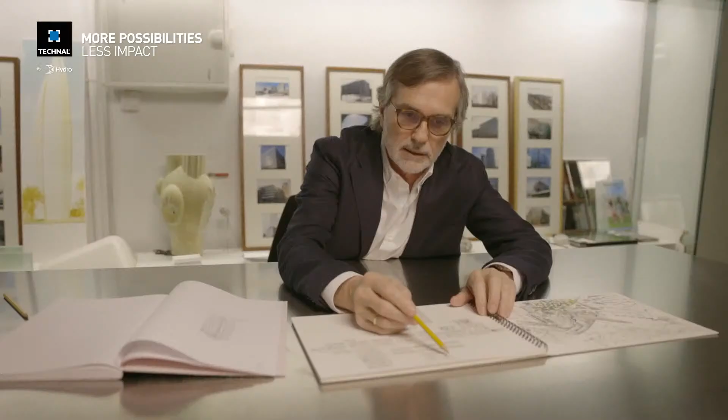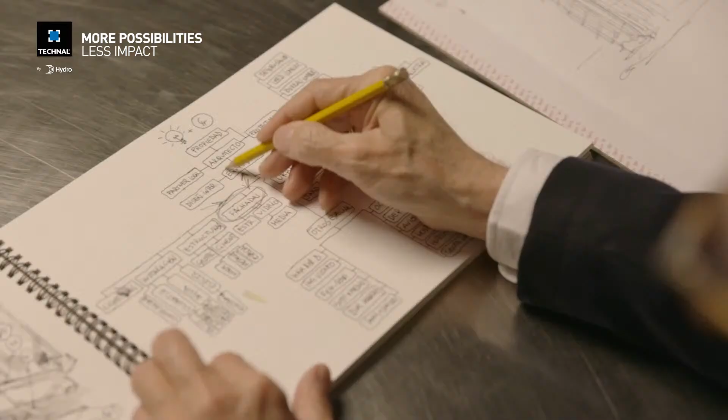First of all, I would like to introduce myself with a simple sentence. Yes, I'm an architect, but an architect with a special profile, because my team and I have developed more than 180 buildings in the last 30 years, making credible the ideas of others, sharing them by teaching in different universities, and especially drawing. We have a small and very dynamic office based in Barcelona, from where we offer facade consultancy for the best architects around the world, including Pritzker Prize winners.

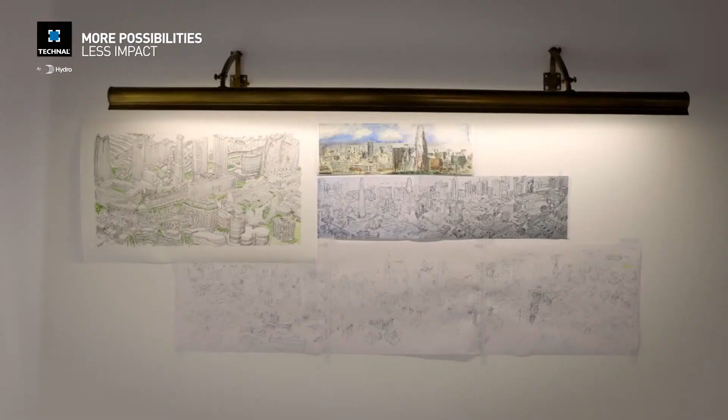Usually, architects imagine the result and the engineers create the process, or explaining it another way, architects think what, and engineers know how. So we, as facade consultants, move in an equidistant position between both, and our projects are developed with a simple philosophy: technique and form are the same.

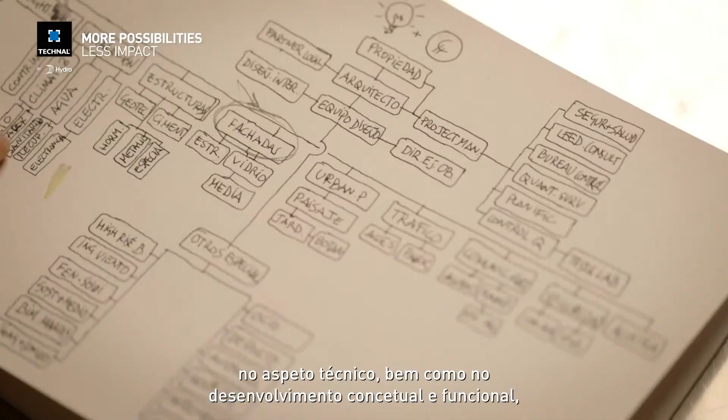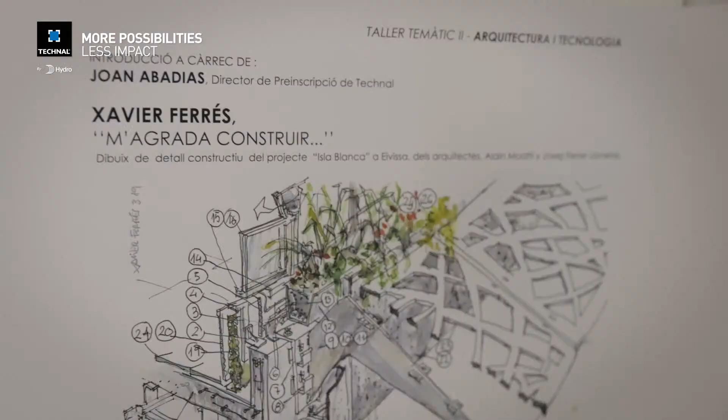Every day, more and more architecture studios focus their work on the level of definition of the facade, the technical aspect, and the conceptual and functional development, leaving the detailing and the specific topics and elements of the facade to be delegated to technical specialists from the industry. So the most common way to face the problem of technology is to claim the support of brands that help us develop the most ambitious projects. Our role as consultant, in addition to the above, is to think and advise from the strategic development.

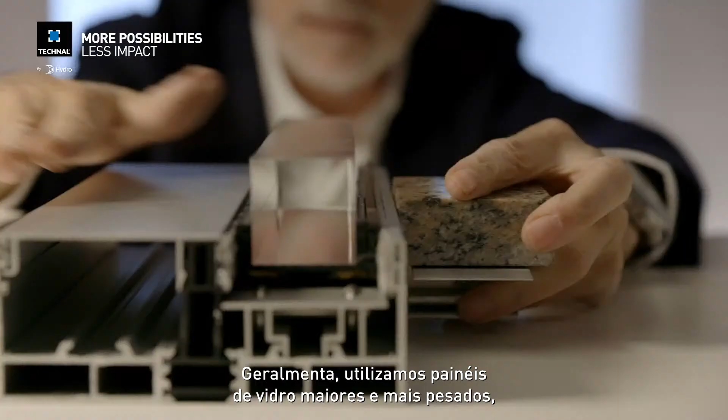The present leads us to consider energy as one of the engines of evolution, and this has been the case for decades. However, this contrasts with the need to work with large formats and glazed surfaces that increase the so-called window-wall ratio, meaning the energy performance of the facade is in contradiction with the dimension of the transparent areas of the buildings. On the other hand, this need to increase sizes requires larger panel dimensions, engineered for bigger and heavier glass panels, by means of innovative connection and reinforced glazing support.

Last year, we started with a jumbo glass measuring 3.2 by 6.2. Actually, with different suppliers, we now have glasses up to 18 meters in height by 3.4 meters. So obviously we can use these sizes of glass.

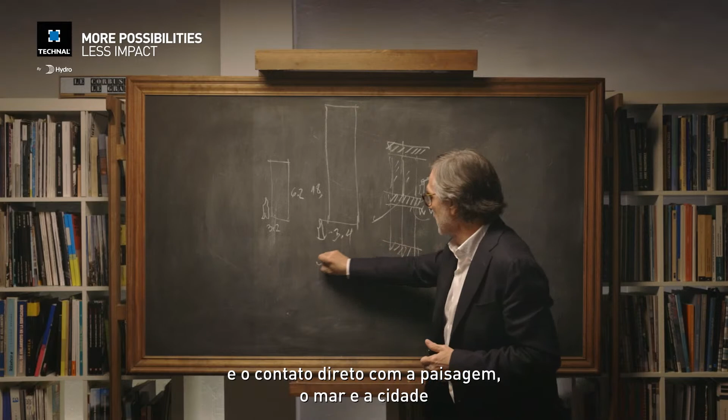The trend of buildings around the world is to increase the glass surface, but balancing with the window-wall ratio, because we need to balance the comfort of users contacting directly across the glass with the landscape, the sea, the rest of the city, in order to respect the rules and regulations in terms of energy savings.

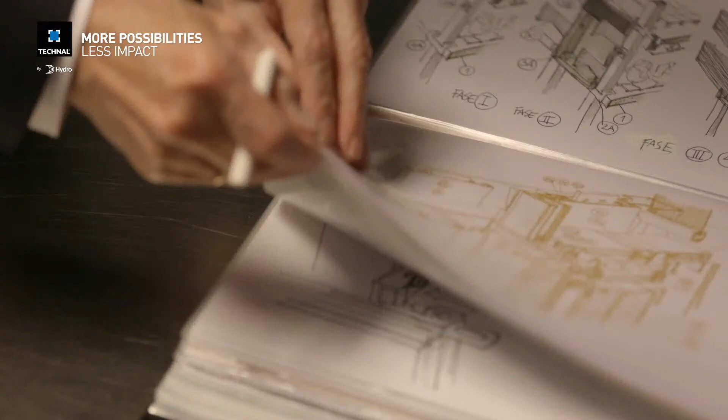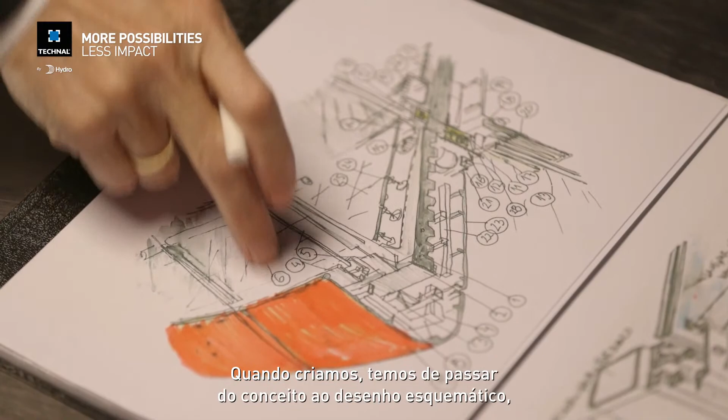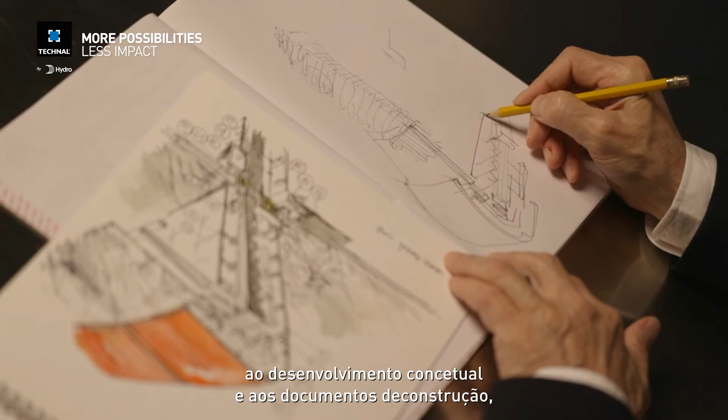The only way that I can explain my experience, my thought, my feeling about the technical decisions and technical elements, is drawing. My brain is connected with my hand directly. When we are creating, we have to pass from the concept and schematic design development to construction documents, trying to be proactive with the architects, usually our clients, in order to achieve maximal fidelity to the original idea.

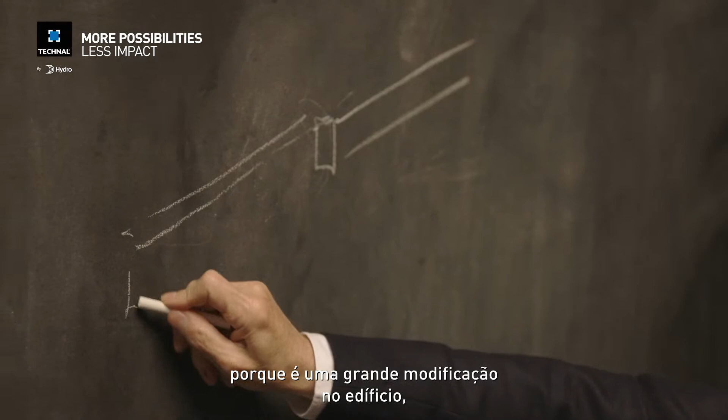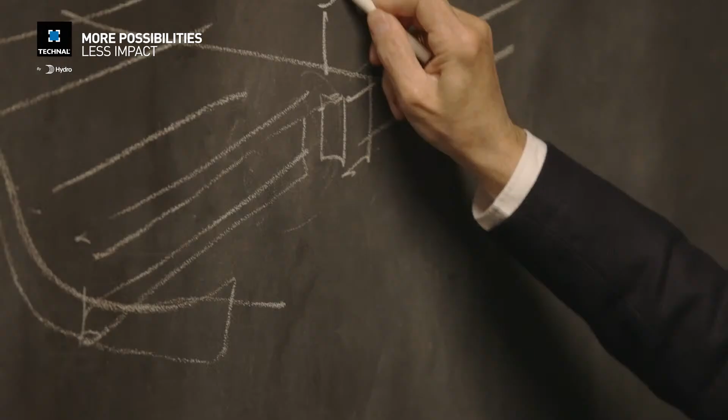For example, a building under construction in Barcelona, named Diagonal Zero, is a multi-story building, I think 27 levels, with a special balcony. This is the original slab, because it's a huge modification of the building. This is the slab, this is the beam that we have to support, the level of the interior floor, this is the exterior floor, and we have a shape like this.

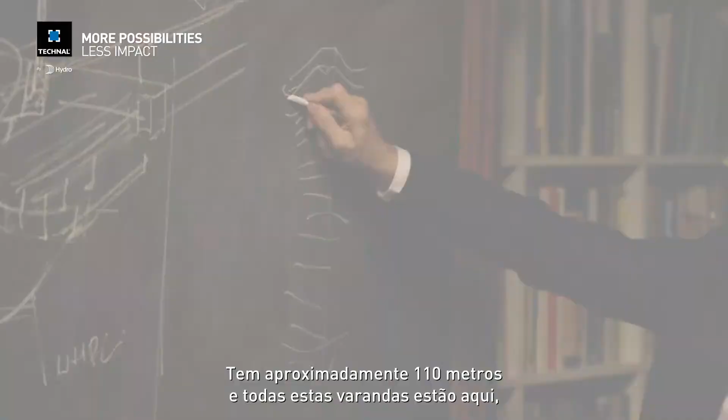This is a balcony, this is a terrace. The building is something like this, more or less 110 meters, and all these balconies are here. And in the lateral facade we have a typical curtain wall.

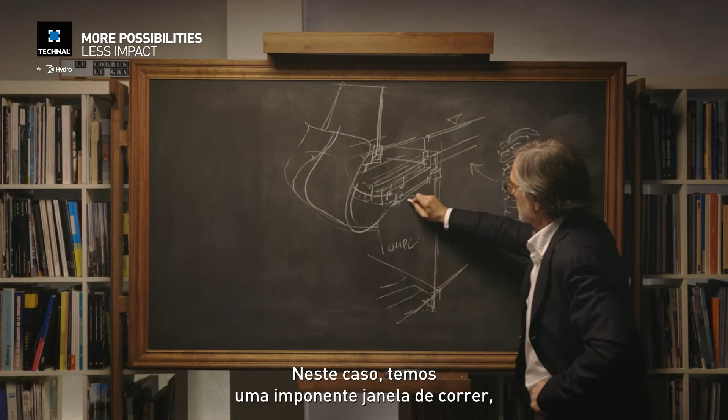It's a profile typical with spandrel, glass and windows, etc. The pass from here to here is very important to understand what happened: what is the slab, what is the structure, what is the weather line. In this case, with an imposing sliding window, maybe 250 meters height, we'd like to show this in color, but I think it's clear in order to understand what happens when we have to develop from the concept to the detail.

The second case that I would like to share with you is a commercial and residential building in Ibiza, named Isla Blanca. The author is l'agence Moatti-Rivière de Paris. The project is led by Alain Moatti, and the local partner is Josep Ferrer Llaneras.

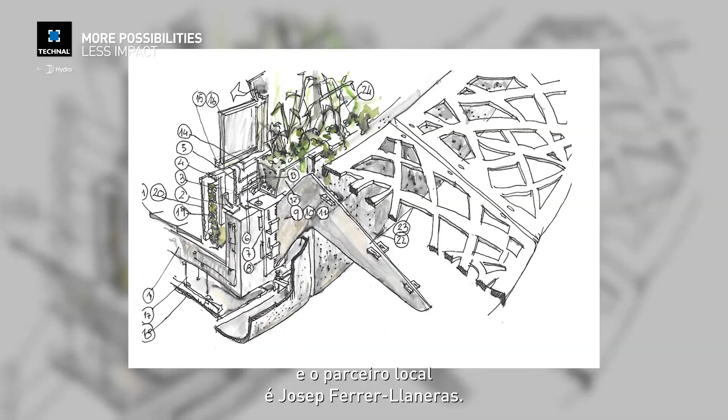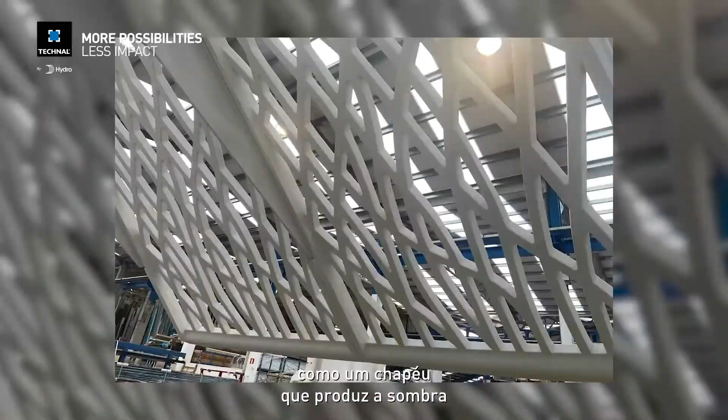The main concept is a shadow device named voilette in French. It's an element that flies. So the building is double like this, maybe 80 meters of length from here to here, using this kind of material like a hat that produces the shadow under the face of a woman on the beach. This element is something like this.

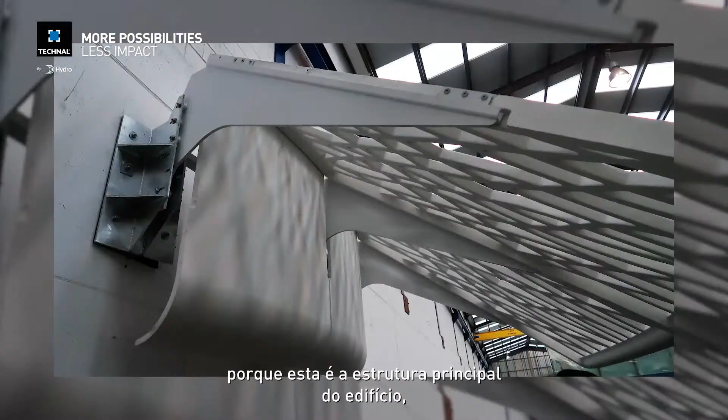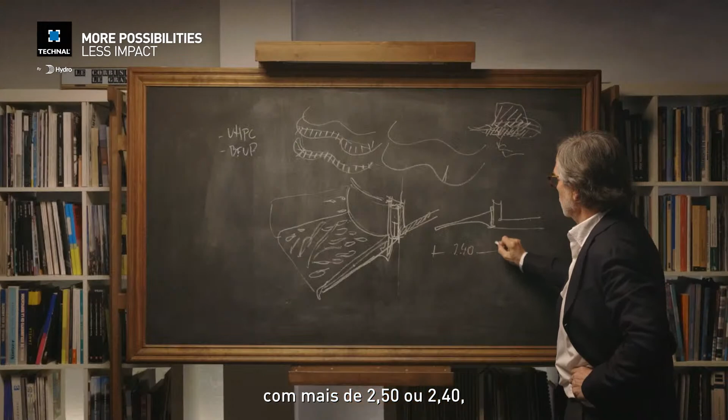There are different molds because this is the main structure of the building, and here is hanged a huge element like this that supports these curves. So we have the structural element, this is a cantilever, more than 2.40, and this is the voilette in ultra high performance concrete that allows it to work perfectly like a shadow device.

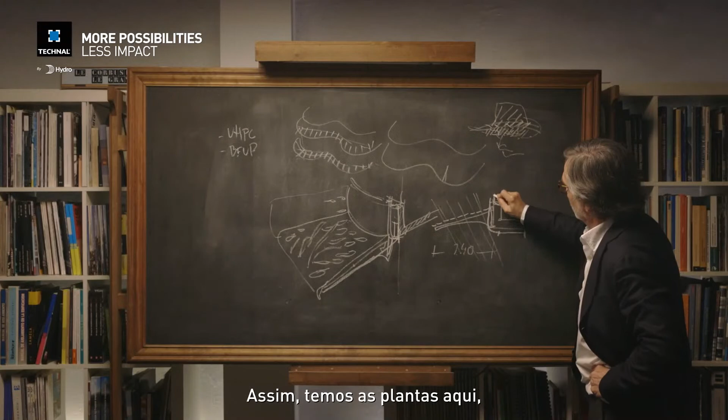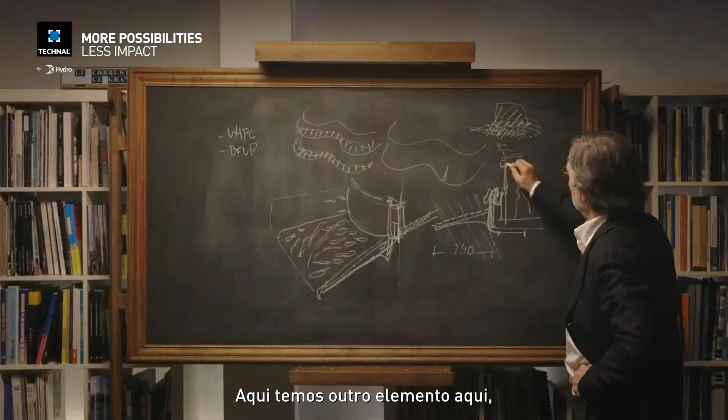So we have the vegetal elements here, and we have the windows, openables, etc. From here we have as well another element that is the characteristic of this building.

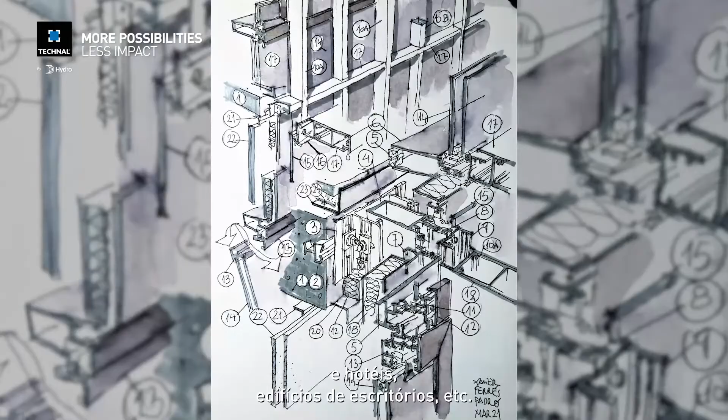The third case study is a multi-story hotel in l'Hospitalet, near Barcelona, in the Plaza Europa zone. It's a huge complex with a lot of buildings, hotels, office buildings, etc. This case is a project of Alonso y Balaguer. It's the most common and typical curtain wall facade. The building is a parallelogram like this, with a typical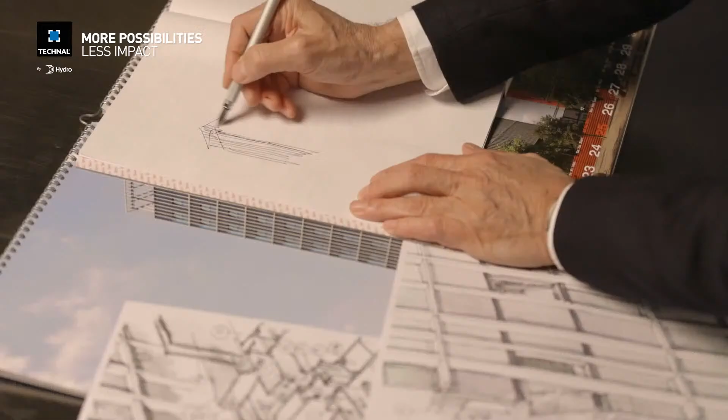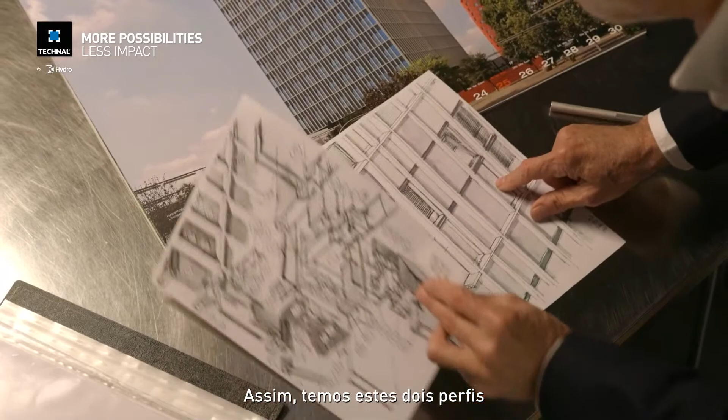zone with machines and the HVAC equipment, etc. The rest of the facade is a grid, absolutely regular, with the profiles that I will explain, because in terms of technology it's very simple, but the effect is really very interesting. So we have these two profiles, and they are clipped under the main mullion of the facade, and that's it.

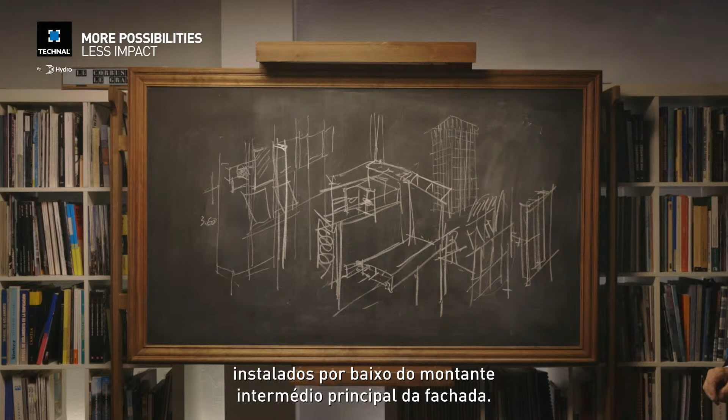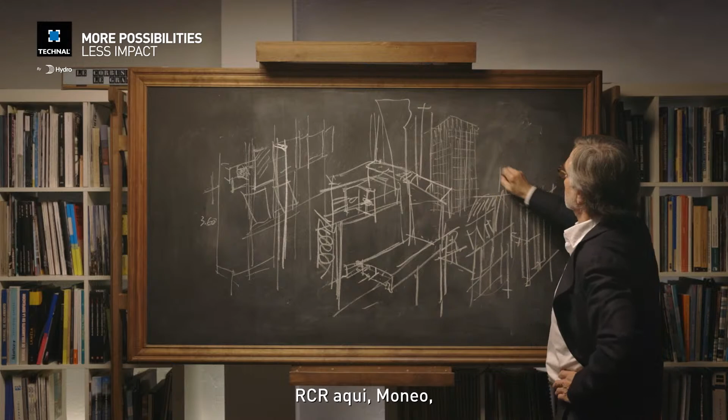So we have here the Toyo Ito building, the Nouvel building, RCR here as well, Moneo, and it is a very interesting complex that I invite you to visit, because if you are an architect passionate, I think it could be a good option to spend one day in order to know directly all this kind of different architecture.

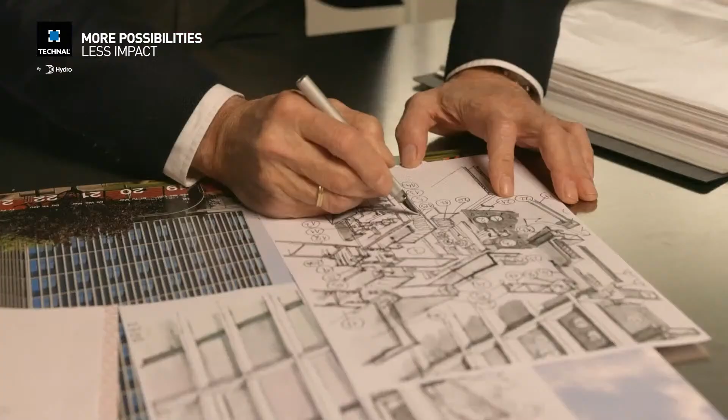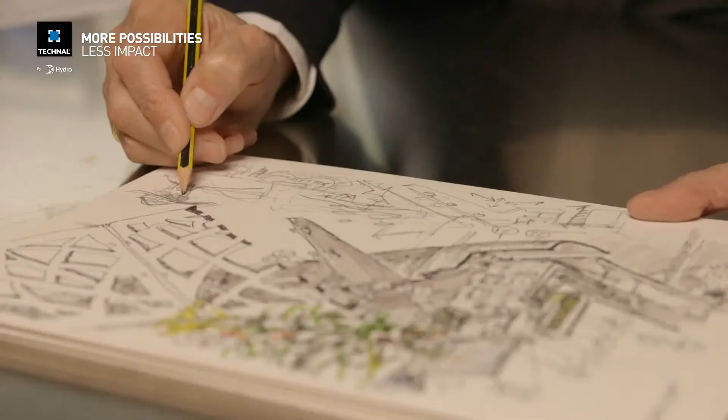As conclusion, I would like to share with you 5 thoughts as a summary. First of all, evolution that improves considering aspects from different points of view, like industry, architects, investors, owners, and consultants like us.

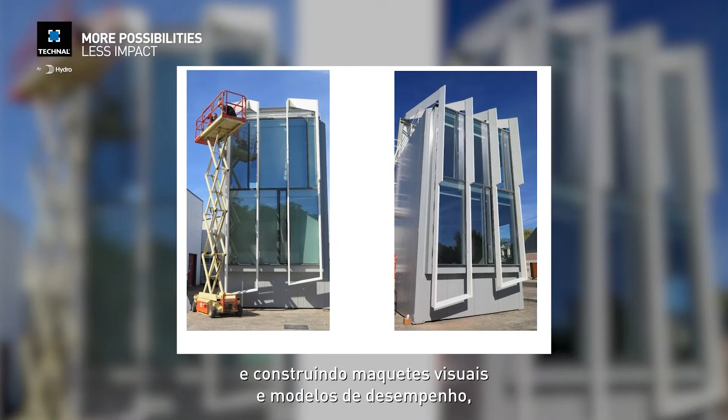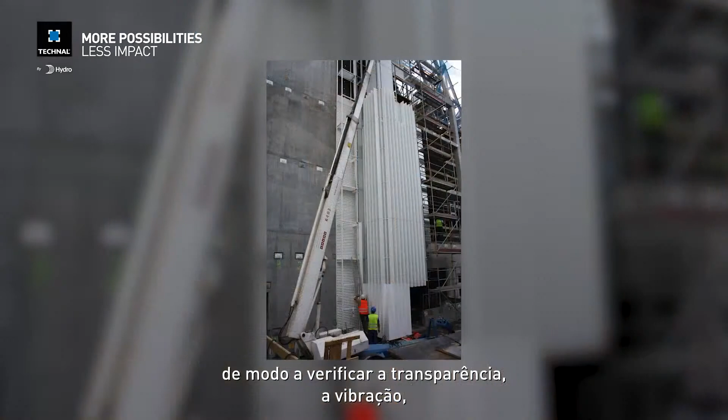Second, the extreme conditions of use are solved anticipating the problems and building samples and performance and visual mock-ups that are tested by the owners in terms to approve the final solution, in order to check the transparency, the vibration, all the aspects that we have to control by using prototypes and mock-ups in real size.

Third, we have to look for collaboration for international brands that belong to a big and well-known group. It is the best option to guarantee a long experience of success.

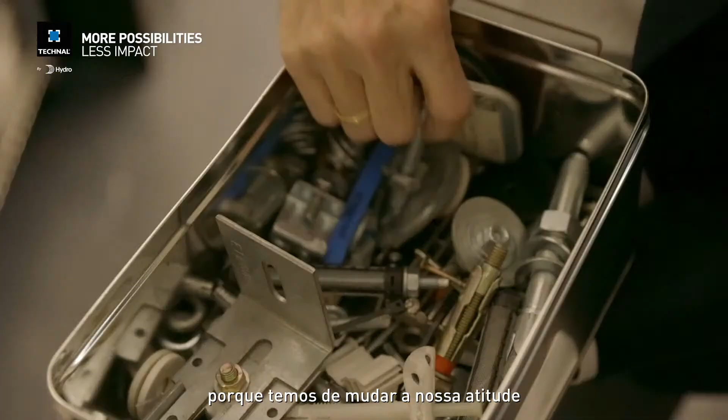The fourth topic that I think is important to sum up this small explanation: involve the clients and users in the project—planning, commissioning, exploitation, maintenance, live and recycling building as a way of working—because we have to change our attitude about the design and use of the buildings.

And finally, we have to work from a global perspective, making it essential to combine the most diverse languages, cultures, rules and regulations, economic and social criteria with the most attractive architectural proposals. And for us, it's a privilege to be able to create a space for a better future.

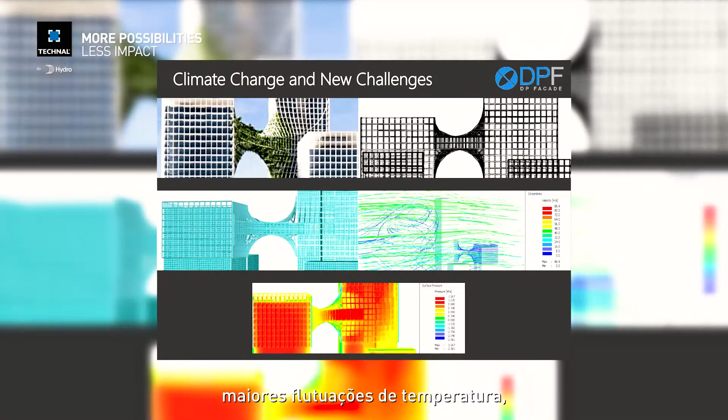This is one aspect I wanted to touch on briefly now, which is what's happening with climate change. With climate change, what we're having now is more extreme weather, greater winds, greater temperature fluctuations, a whole bunch of additional considerations that make designing facades much more complicated and that require much greater care from the facade consultant handling the facade.

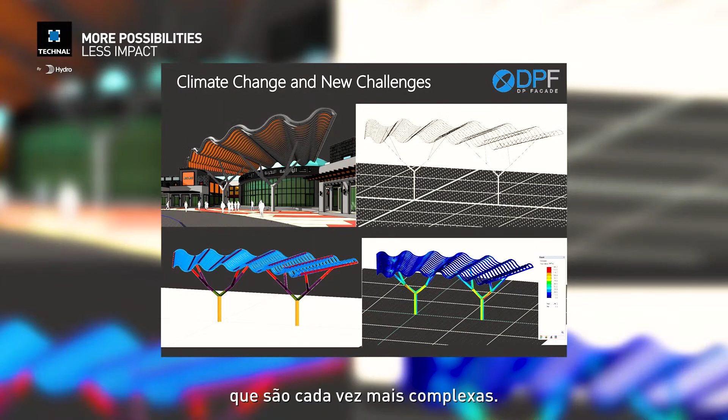On top of that, to make matters worse in a way, or maybe to make matters more interesting, that's how I'd like to think about it. Architects are designing facades that are increasingly complex. It's almost like a competition, who's going to get the ideas that outweigh or outdo the predecessor, so to speak. And we get complex geometries, various aspects in the design of facades that really challenge us to bring our best when we work on these projects.

To do this, we've had to develop or acquire a bunch of new tools that we did not traditionally use. When I started as a young facade engineer, I used to do everything by hand, whether it's the sketches, the calculations, everything was done by hand. Today we're using technologies such as BIM, parametric design, and dedicated engineering software. We make use of 3D rapid prototyping to test ideas, to see, does it even make sense?

Is it buildable? We've even developed tools that are not on the market, something we call IVMU, an interactive visual mock-up, which allows the designers, the engineers, the architects, the owners, the building developers, to use virtual reality goggles to visualize in real time what their buildings and facades are going to look like, and to make changes in real time. This is really a fantastic tool that we've developed over the past couple of years, and that really changes our approach to designing facades on these complicated buildings with multiple materials and complex geometries.

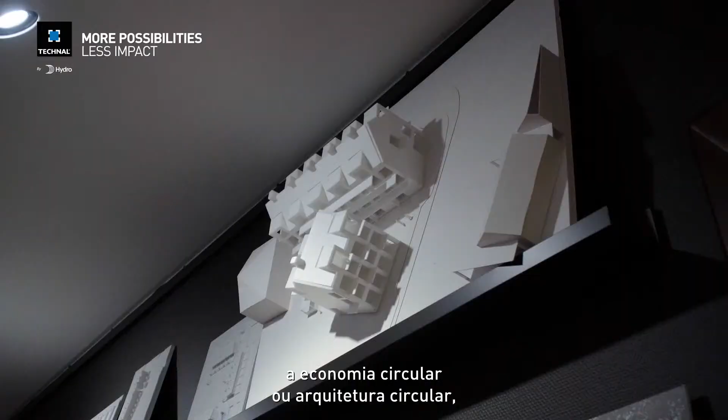The next one is circular economy or circular architecture. And then we work focused with biodiversity. On the social sustainability side, we work with safe environments, health and well-being, and then placemaking.

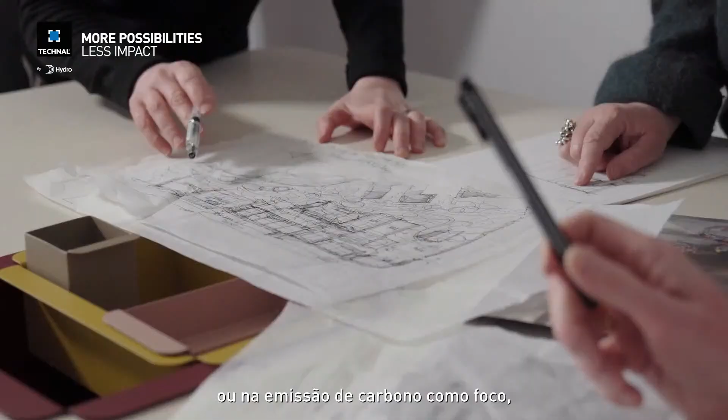So if we start with climate smart architecture or carbon emission as focus, we work very much on designing buildings with a low carbon emission or carbon footprint. That is both from operations when it comes to energy efficiency, but also when it comes to embodied carbon, which means the carbon that is emitted when producing the materials that go into a building.

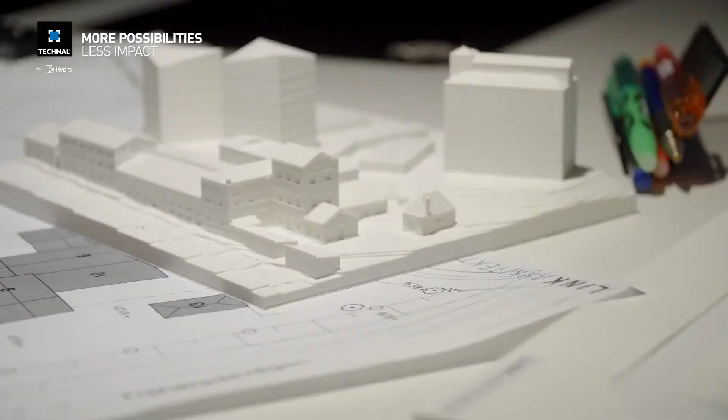If we then talk about circular economy and circular architecture, it's very much about designing resource efficient, securing that we don't use resources unnecessarily, but also about taking care of the buildings that are already built, so transforming or renovating buildings before we start looking for producing new buildings. It's also about reuse and recycle of materials, and also designing for circularity, preparing our buildings for a future that is more circular than it is today.

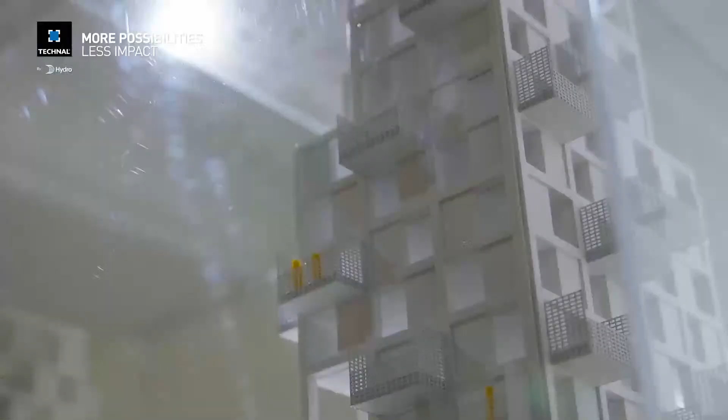And then we can talk a little bit about biodiversity. We know that the built environment and producing materials and constructing the buildings have a great negative impact on biodiversity. So when working with the built environment, it's really important to look at biodiversity and see how we, when we construct our buildings, can choose materials that have a low impact on biodiversity, and also work with biodiversity when we create the environments, the built environments within the cities.

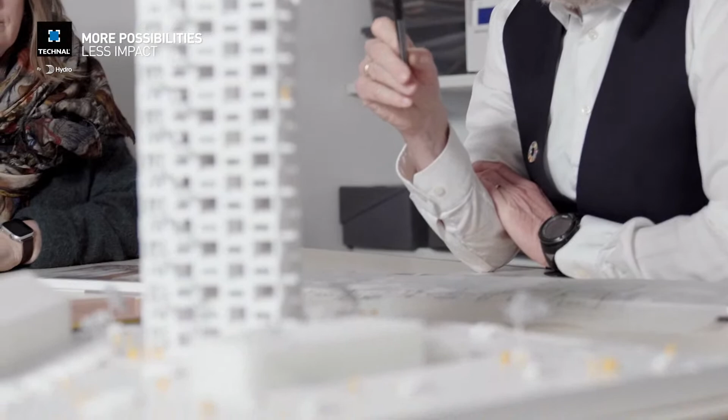If we then talk a little bit about the social sustainability that we work with, one of the areas is safe environments. We know that creating safety within, for example, residential areas, schools, housing, etc., creates people that feel safe and can take in, for example in schools, their education better. They come to school - not being safe at school can make students not come to school. So safety is a very important part of our contribution to social sustainability.

And then we can talk a little about health and well-being. That is an important part if you work with offices, hospitals, schools, also residential areas. If you can support a living that is healthy and supports well-being, then you can solve or contribute positively to some societal challenges. We know stress is an area, at least in the Western world, that is problematic, and we know different heart diseases and so on.

And then the last one is about placemaking, and that is both about safe environment but also about interesting environments, places where you want to stay, places where diverse people can come and meet, and you can feel the inclusiveness because you want to stay there, you want to meet other people.

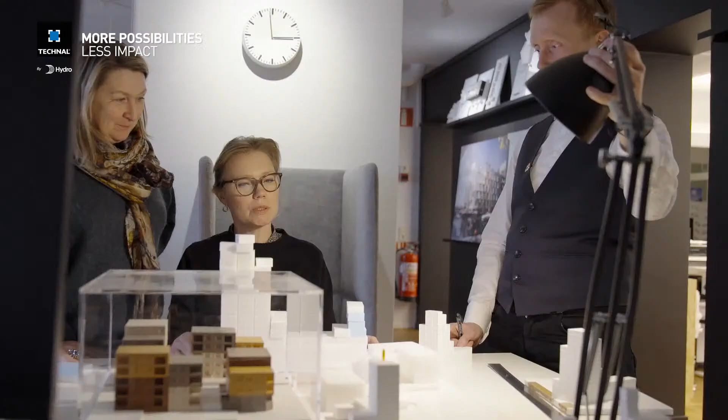And then we also play a very important role when it comes to the actual design. So through the design we can work with, for example, indoor environment when it comes to designing so that daylight comes into the building, that you have a good view of the scenery, and also working with designing so that we minimize the negative impact of the built environment in relation to resource usage or carbon emission and stuff like that.

And then when we come to looking at choices that we make, for example in relation to materials, we have a great possibility to influence the final positive impact in relation to sustainability by choosing materials that we know can lower, for example, the carbon emission, the carbon footprint of the building, or adding to some qualities in relation to indoor environment.

Well, if we talk about materials, we know that the construction industry and producing materials have a great negative impact on the environment. It's everything from polluting the air and the water. It's about using resources, virgin resources, that are rare or scarce or limited. So we have to make sure that we don't use them too much, because then we'll run out of them.